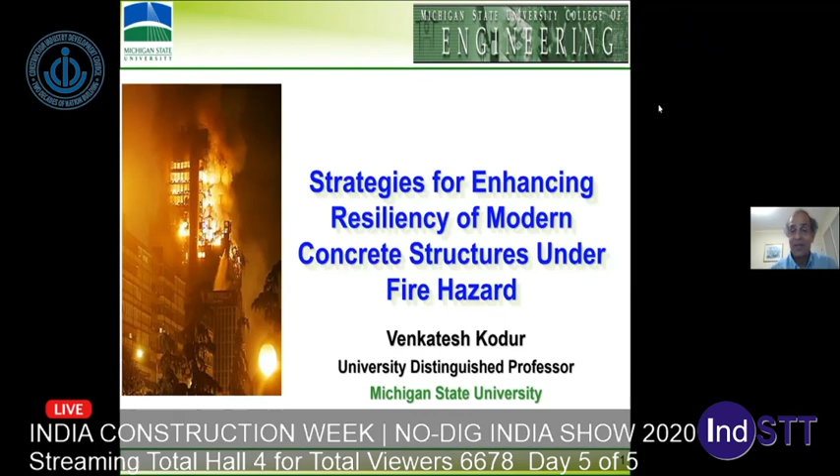The title of my talk is on strategies for enhancing resiliency of modern concrete structures under fire hazard. The buzzwords here are resiliency, modern concrete structures, and fire hazard. So those three are the buzzwords here.

What I'm going to do today is give you some background on the overall importance of fire safety, specifically in buildings but also in critical infrastructure. Then I'll look at why resiliency is much more important in current or modern concrete structures as opposed to structures from 30 years ago. I will illustrate some fire statistics to show the magnitude of the fire problem around the world.

After that, I will briefly mention various experimental and numerical studies we have carried out to develop techniques and technologies to overcome fire problems, especially with new concretes. I'll discuss some critical parameters, and finally, at the end, I'll point out some innovative strategies that can be implemented in new concretes and new structures to overcome not only the fire problem, but also enhance resiliency.

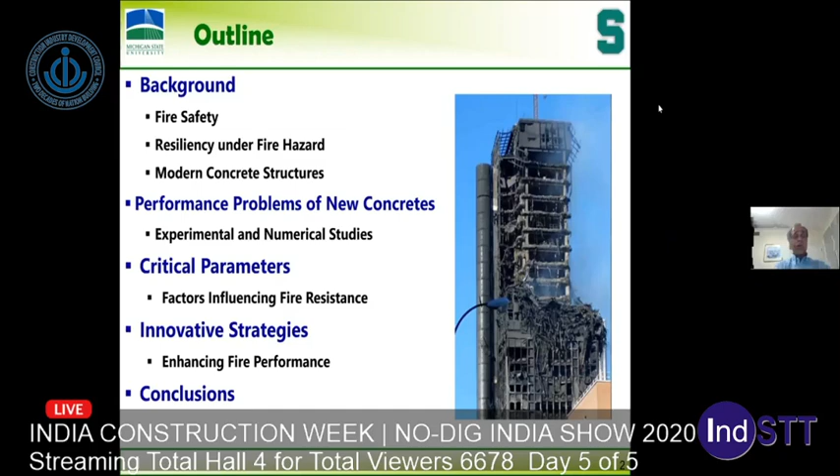As we all know, concrete is the most widely used construction material in most, if not all, countries around the world. There are a number of advantages, and a lot of times these advantages are taught very well, even in early concrete courses. But one of them, which is conveniently forgotten, is...

It started because timber or steel has significant problems with fire resistance. I will define what fire resistance is. One of the best materials from a fire safety point of view is concrete for structural members. That's why it's widely used as well.

There has been significant research and development with respect to concrete, especially from a materials point of view. This has led to new concretes, such as high performance concretes, high strength concretes, ultra high performance concrete, and fiber reinforced concrete. Much of these concretes provide very good strength, stiffness, durability, sustainability, you name it, much of the needed properties. However, with the recent concretes, one of the problems is fire, which we will come to in a second.

Fire is a major hazard in built infrastructure, especially in buildings, because of life safety requirements — fire poses a significant hazard and threat to the built environment. Conventional concretes usually have much higher mass and much higher fire resistance, but the same is not true with the new types of concrete, which I will show you quickly.

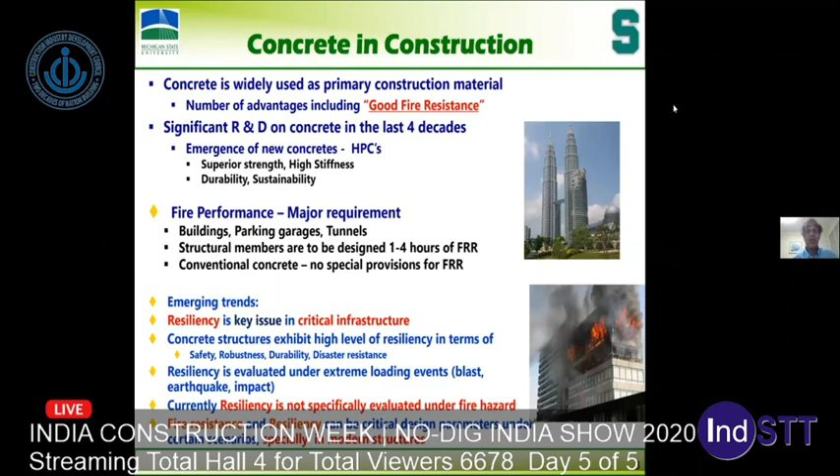The emerging trend over the last 30 to 40 years, in most parts of the world, is that resiliency is the key buzzword for critical infrastructure. This includes buildings, bridges, tunnels, whichever we classify as critical especially. Concrete structures exhibit very high levels of resiliency in terms of safety, robustness, and disaster resiliency compared to different materials.

However, today, in the current way of doing things, we evaluate this resiliency in critical infrastructure under blast, earthquake, and impact, but we don't do even the basic things for fire hazard. It's all based on prescriptive approaches developed 40 to 50 years ago, present in the codes and standards — not in any country, even in the US. These are all based on single tests done on columns at Underwriters Laboratories or NRC Canada. Still, we continue to use those provisions, which are not really applicable for modern construction.

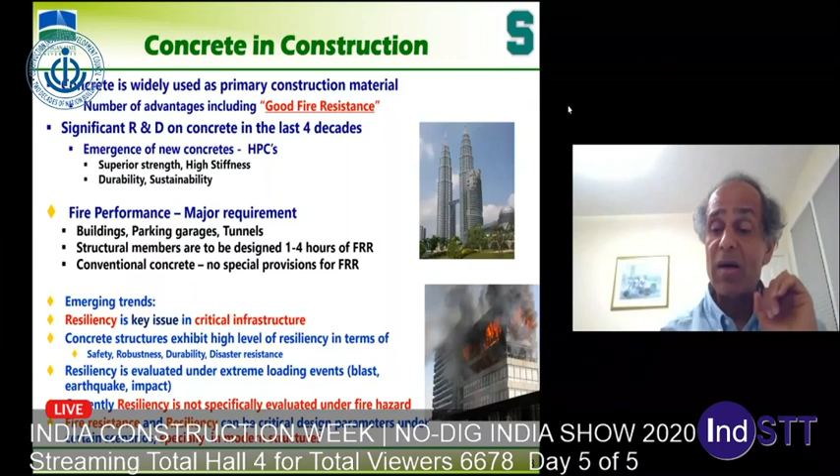So, fire resistance and resiliency specifically under fire hazard are not evaluated, and modern concrete structures are susceptible to problems, especially under fire.

Now, I don't want to spend too much time. Fire, as you all know, is a significant hazard in terms of statistics, not only for people but also for infrastructure or structures. Here are some statistics: in the US, there were more than 1.3 million fires leading to more than $50 billion of damage in 2017, almost about 2% of our GDP.

Now, when fire happens, remember it can start if something goes out of control.

Either lightning can start a fire on a bridge, for example, or something going out of control in the kitchen can start an accidental fire, like an electric short circuit. That's a primary event. Also, fire can start following a blast happening somewhere, or an impact.

A truck hits a bridge - that impact doesn't do much damage. The bridge is designed for that, but it's not designed for the fire which follows. In 9/11, the buildings were designed to account for the impact loading of a smaller aircraft, not that aircraft. I was part of that investigation, but when we looked at it, it was never designed to account for the fires that ensued the impact loading.

Similarly, even floods can lead to fires, as it happened in New Jersey in 2012 with Hurricane Sandy. So as a secondary event, fire can do much more damage than the primary event itself.

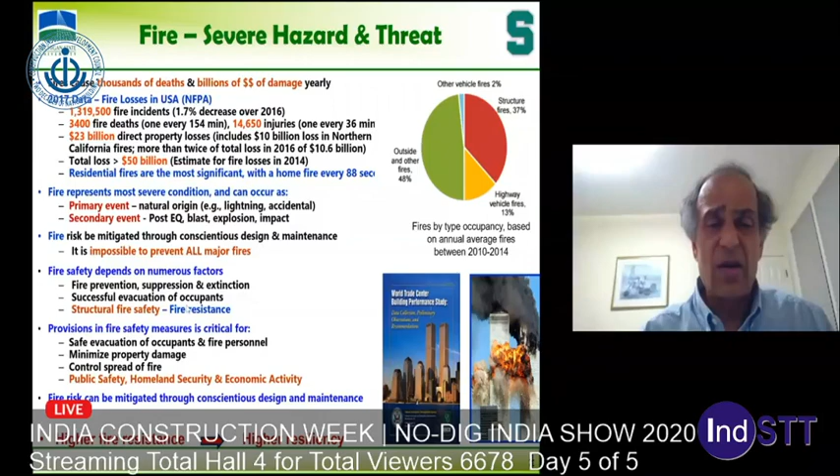Now there are a number of fires around the world. These are some of the recent fires in the United States. For example, the damages from the November 2018 California wildfires were more than $3 billion for structures, and more than $26 billion of insurance was paid out because of that.

This was not major structures because it was outside the towns, but there was some kind of damage to some structures as well.

Now, in addition to 9/11, obviously you all know much more about this, there were bridge fires in the United States, tunnel fires, and warehouse fires. Fires do happen - the Oakland warehouse fire, where 36 people died, again in Oakland, California. And in this case also, there was significant structural damage.

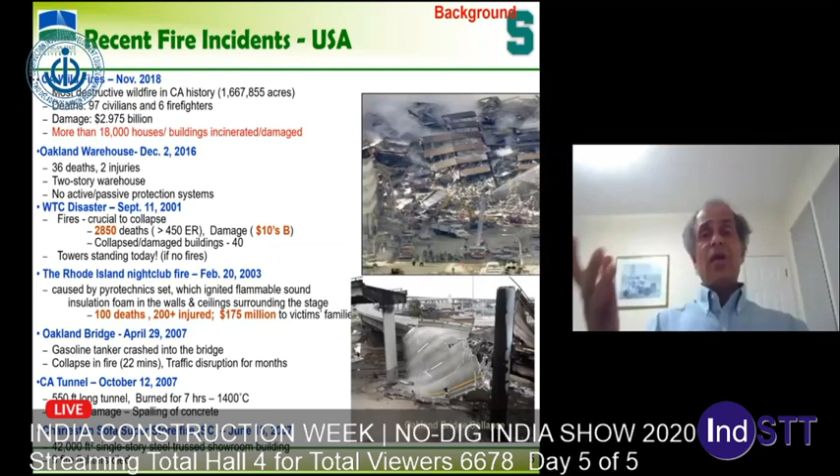Now, I'll just illustrate, there is not much time in today's presentation, but quickly I'll show you how things can go wrong. This is the I-85 bridge outside of Atlanta, Georgia, near Atlanta airport. On a fine evening, 30th of March 2017, spring had just started, what happened was they put underneath the bridge, for drainage repair, a lot of pipes - polyvinyl chloride, PVC pipes.

And then they left it and went, because they wanted to start the work late April or May. All these pipes were there. A homeless person - it was a cold evening - came in and set fire to all the rubble or paper which was around it. And then that went out of control and spread into the pipes, and a huge fire started.

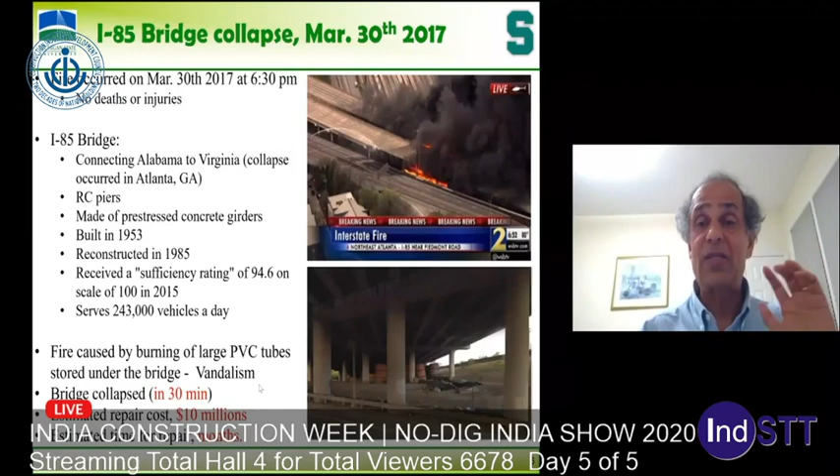And look at this fire - the fire department, because it was closer to the city, Atlanta, a lot of fire engines or firefighting trucks came, but it couldn't be fought. They had to withdraw because of significant spalling. You can see this here - rebars completely exposed, spans of the bridge collapsed. You won't believe how much damage.

Delta had to cancel about 1,000 flights over the next 3 days or more because nobody could get to work. That's the hub of Delta, world's largest airport basically. So I think that's the kind of damage that can happen, and it took weeks for the bridge to be rebuilt.

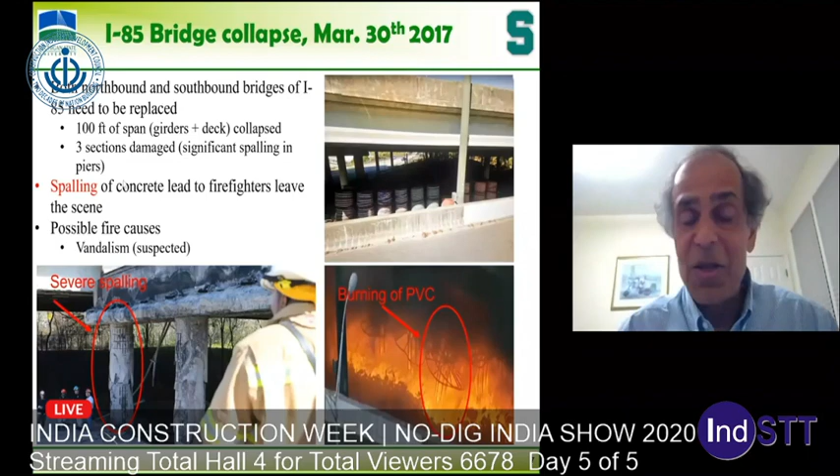There are a number of buildings - I can name hundreds of buildings which were on fire in the last 5 years. An important one is in Tehran, the Plasco building, a 17-story building that collapsed. A number of firefighters died, as well as people. Grenfell Tower, you know what happened there - concrete building. The first one, Plasco, was a steel building.

I was part of the investigation at Delft University of Architecture, a 13-story university building which collapsed because a fire started due to an electric short circuit in a coffee kettle, which was not turned off. So there are a number of fires in buildings - it's a real hazard which we are looking at.

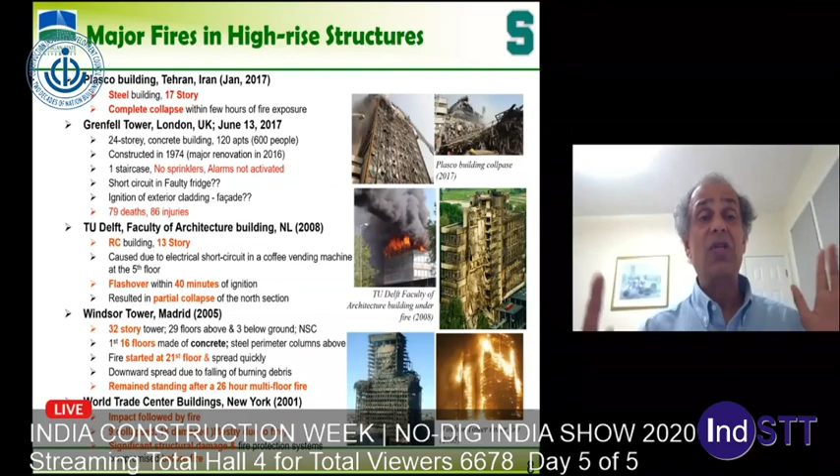If you look at world statistics, as you can see here, India especially has the worst fire record - nearly 24,000 people die every year because of fire incidents. It may not be due to structural damage, but fire as a whole has to be considered a hazard. A lot of times smoke is what kills more people than anything to do with the structure itself.

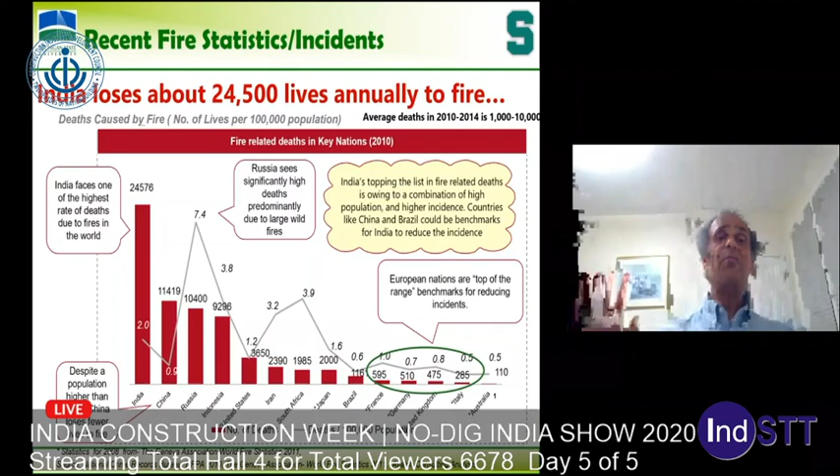Now, how does the current codes address this?

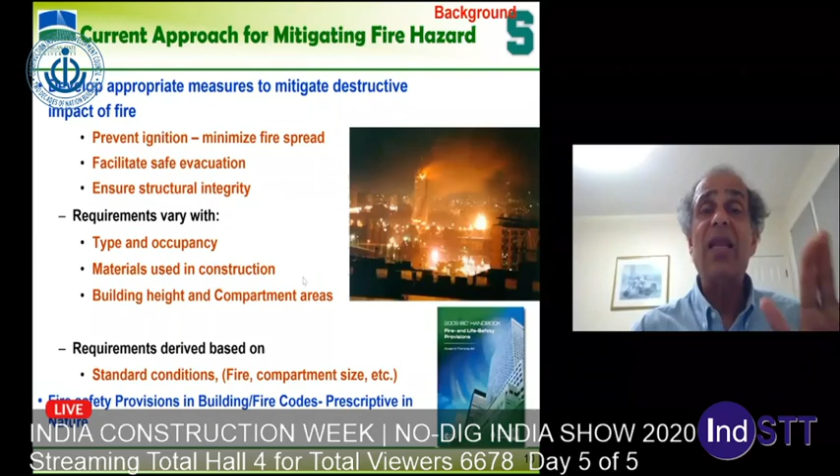Current codes address this by putting in a lot of fire protection measures, and this depends on the height of the building and the type of occupancy. For example, if you have buildings with old age people or hospitals, you need to provide higher fire resistance, so it should stay longer than an office building. These are put in place in building codes, including in India, and every other country has this. Without that, you cannot get a permit to have the building.

What are the fire safety strategies? We put in a lot of measures, as I said, sprinklers. Fire comes out, it should be put out by sprinklers automatically. Most new buildings in the United States are sprinklered, but often sprinklers are not effective, so then people have to be sent out. Then you have fire to be contained to the source of origin in one compartment or one room or two rooms. That's done through barriers, or your structure has to stand up till the fire is fought.

This is what is called fire resistance. Depending on the height and the occupancy type, you need 1 hour, 2 hours, 3 hours, or 4 hours. Under so-called standard fire, the building has to stand up. Okay, so I will skip this slide.

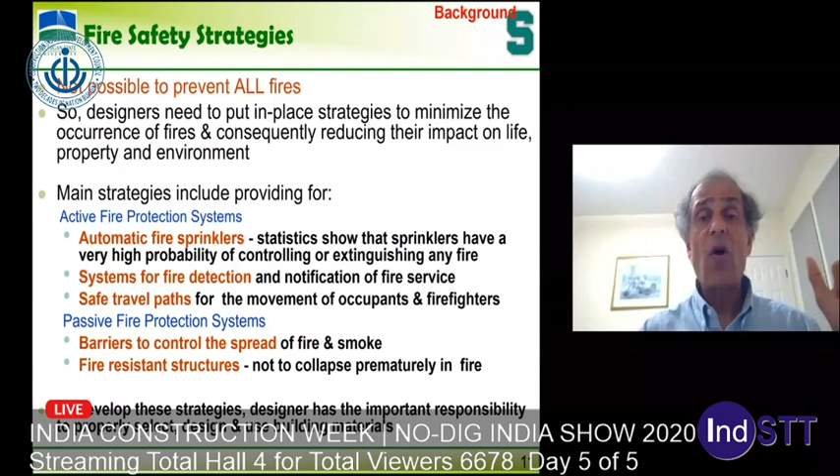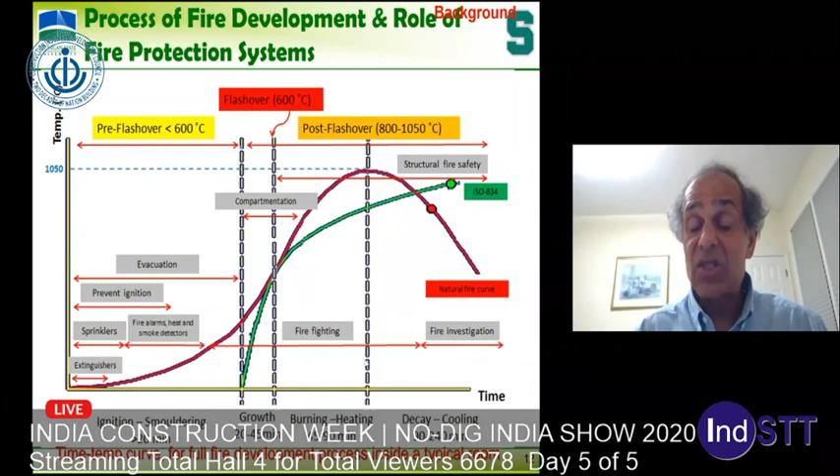So fire grows something like this. Just remember this, nothing happens to the structure here. I'm talking more about structure. People should get out at this time, but for structure, this is the part where structural fire resistance comes into play. So typically you need 2 to 3 hours of resistance in structure so it does not collapse under fire.

This fire resistance depends on a number of factors, including what kind of fire you have, and the type of materials, whether it's concrete or steel. You can see this is loss of strength with temperature. Different materials lose strength at different temperatures. So all this has to be accounted for.

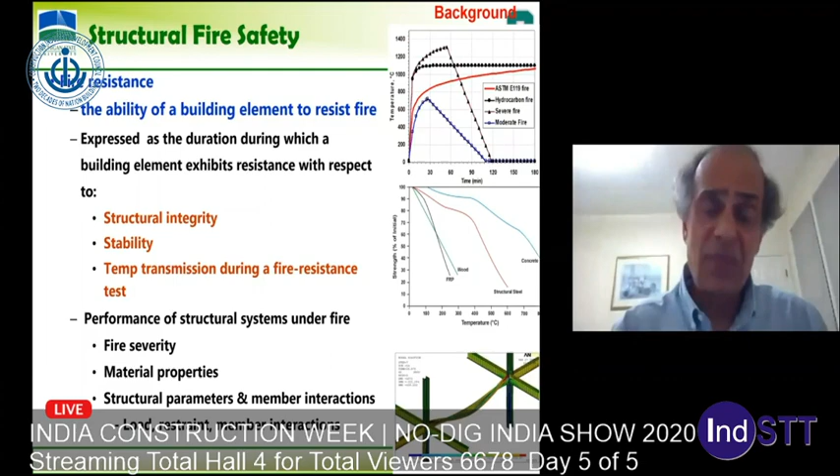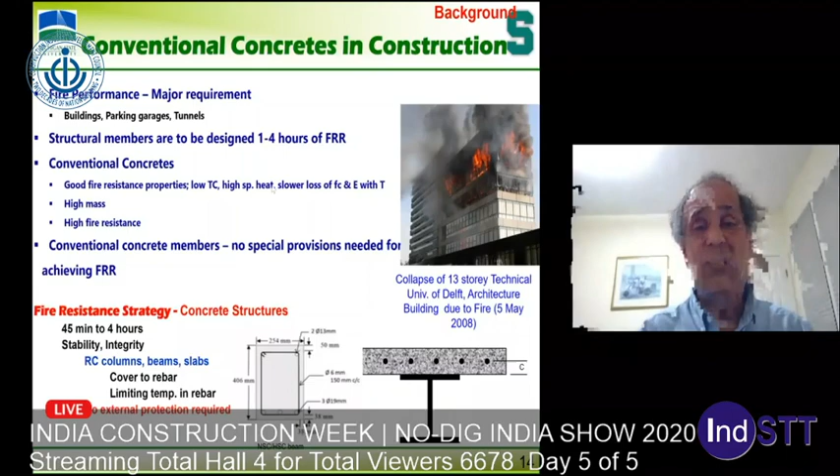Now, American codes are so prescriptive, there's no other way of engineering the system right now. For 1 hour, as long as your dimension is 8 inches minimum, that's 200 millimeters, you get 1 hour in a column cross section, and you need to provide 1 inch concrete cover for getting a 1 hour rating. For 1.5 inch concrete cover, as long as your minimum dimension is 9 inches, you get 1.5 hours rating, and so on. As simple as that, which is not realistic.

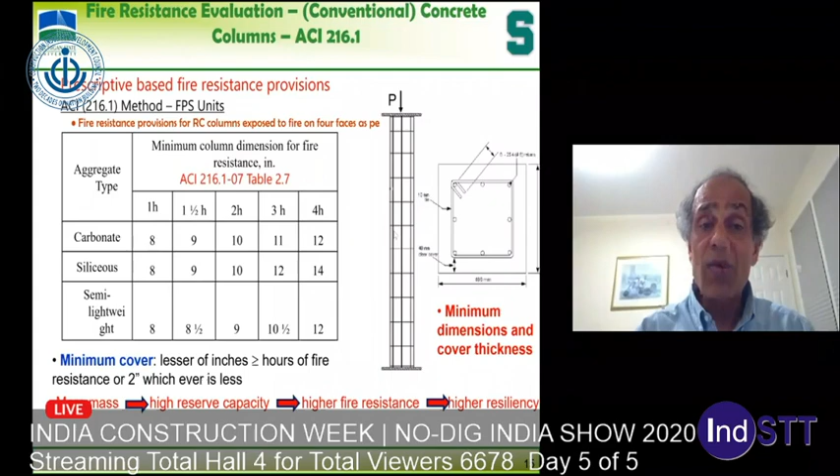Now, what about Euro codes? Very much similar, look at this. In one table, they cover beams, columns, slabs, and walls, with the same approach, very prescriptive. Now I have to move on quickly because of the time.

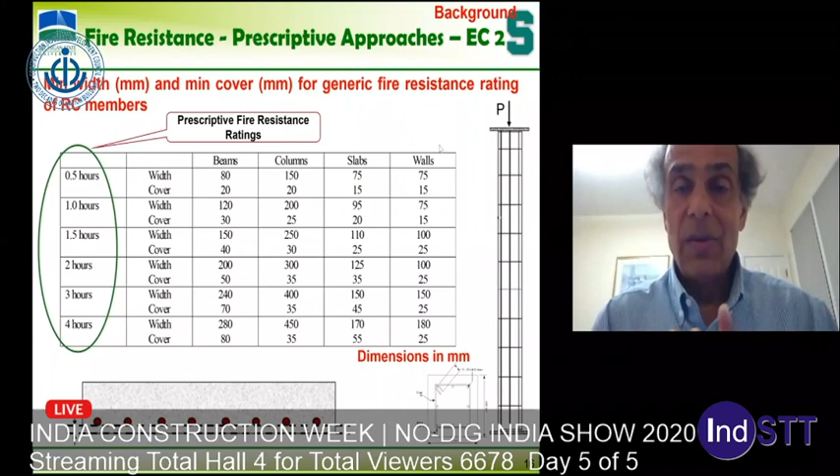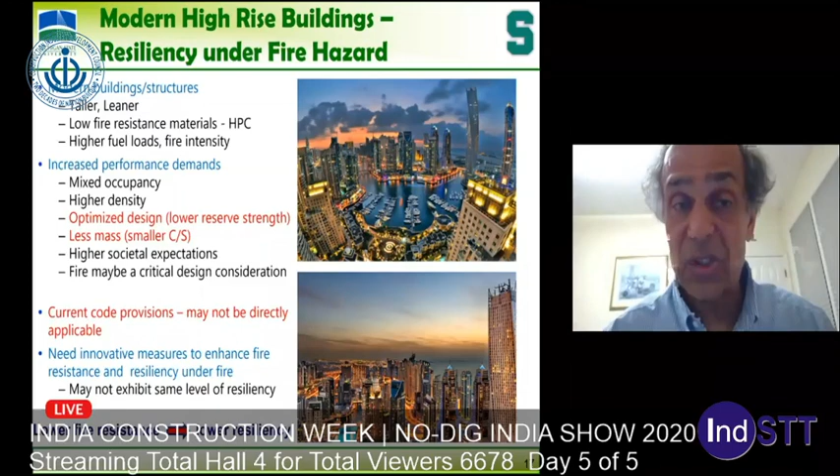Modern structures have significant problems because they are typically taller compared to 70s, 40s, 50s structures, and they are leaner, I will show you that, and they are made of new types of materials. Newer materials have lower fire performance, and we have increased demand on modern structures because we use all this nonlinear analysis and make the structure very slim. So the current codes, if you take the modern structure, have lower fire resistance compared to the equivalent structure of yesteryears.

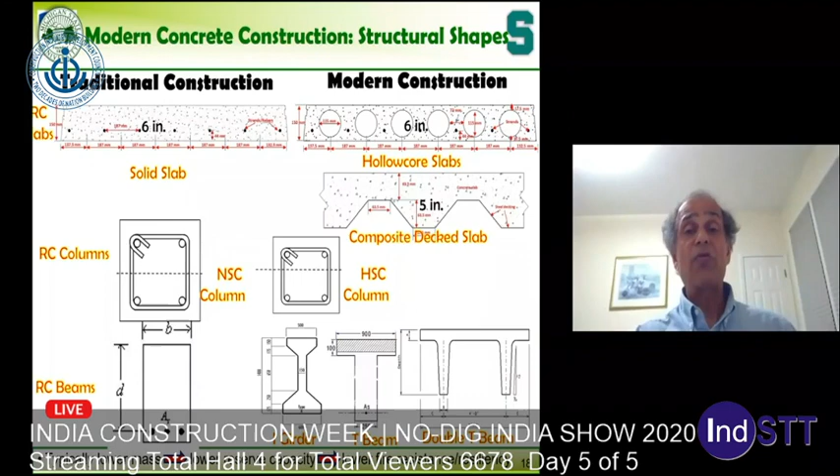Now look at this, how different modern slabs are, if you take a solid slab versus a hollow core slab. If you take a column, look at this, how small we are building with higher strength concrete. Same thing, we are using this type of shapes. Similarly, our concretes have much more problems because we increase the concrete strengths, and it comes with lower permeability, making it susceptible to two things.

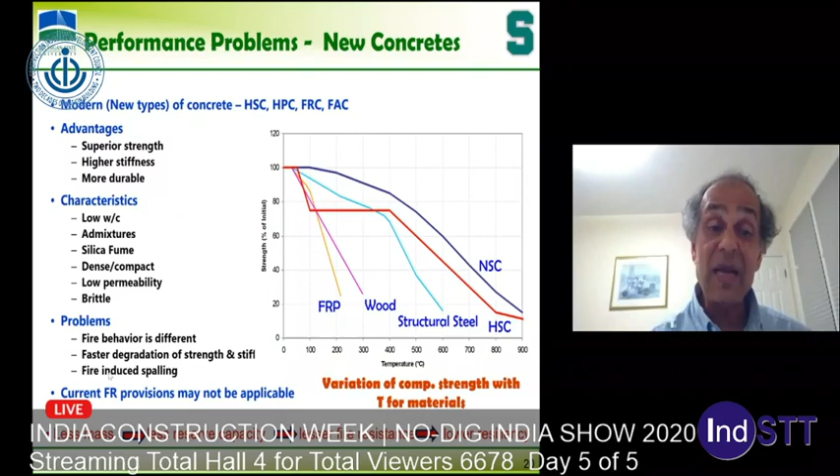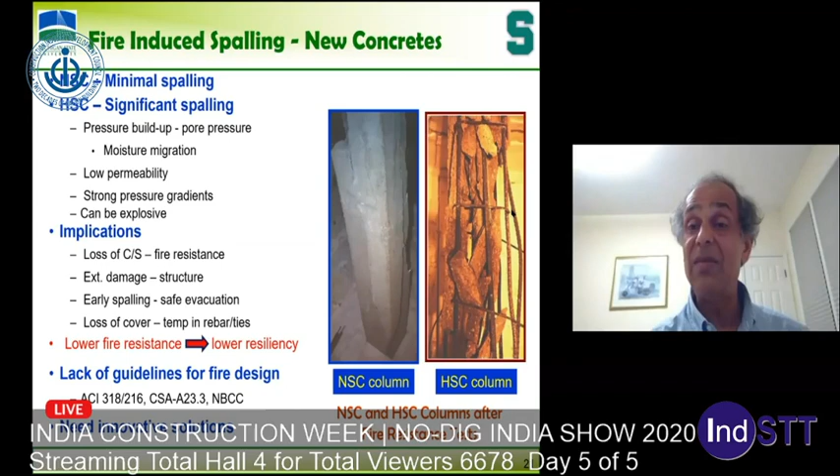The second bigger problem is the occurrence of so-called fire-induced spalling. Look at a concrete column, 6 hours in fire, which I tested, nothing happens, a 16-inch column. This is a typical column used in Chicago. And look at this high strength concrete column, it spalls in 19 minutes. This was done for the Portland Cement Association and Construction Technology Laboratories. I did these tests at NRC, about 15 columns were tested for them, in addition to a number of other things, so we developed a lot of guidelines.

So this spalling, basically why it happens, is a buildup—when exposed to fire, this has lower permeability, moisture becomes vapor, and it cannot easily get out here.

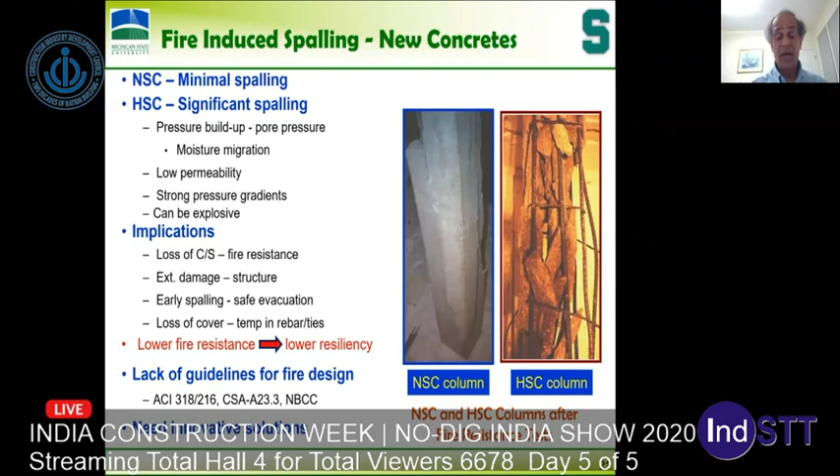10 to the power of minus 16 is the permeability. When you reduce it by 100 to 1000 times to 10 to the power of minus 18, that pore pressure converts into the tensile strength and pushes this out. So boom, boom, boom, throughout this fire scenario, you will have spalling, and this spalling can reduce fire resistance significantly.

We did a number of tests, and we did the material property test. Over 30 years of my research has been focused on this, first at NRC Canada and then at Michigan State University now. We've developed about 15 PhDs so far who have graduated on related topics. We have developed advanced analysis models, and recent work has been to develop much more guidelines.

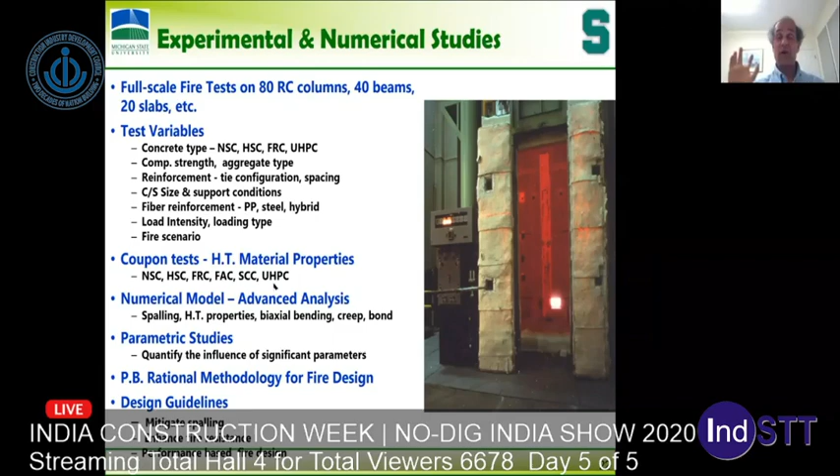As well as with ultra-high performance concrete. The concrete, as I said before, current codes say only cover thickness is the issue, the size of the member, but it is affected by so many factors: strength of concrete, reinforcement layout, density of concrete, type of aggregate, whether you're using limestone or quartz. So there's a number of things.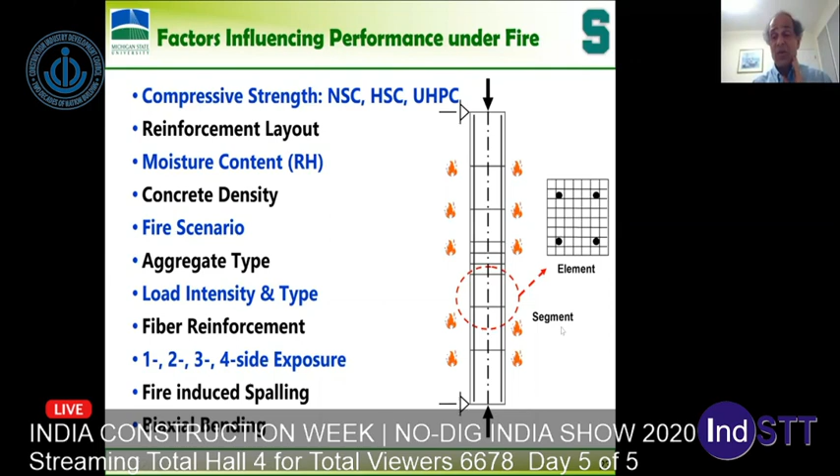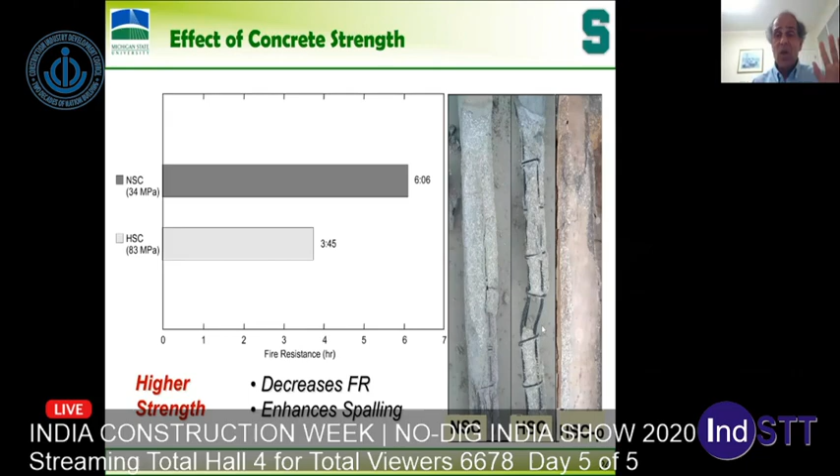As you can see, higher strength concretes, conventional concretes, but if you add fibers, you can significantly minimize this spalling which is happening. Okay? So another thing is, if you bend the ties, it enhances fire resistance significantly. Bending the ties at 135 degrees - this we did for PCA, and this is in American codes right now. You can reduce spalling significantly even with higher strength concretes.

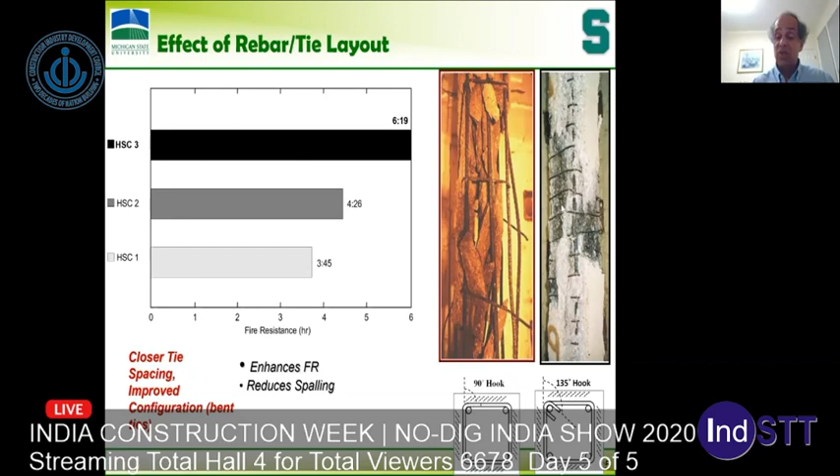Then concrete, when it is subjected to a column, for example, when it is subjected to concentric loading under fire, you have explosive spalling happening on different sides. That means your concentrically loaded column becomes eccentrically loaded, either due to development of thermal gradients when only one side, two sides, or three sides are exposed to fire.

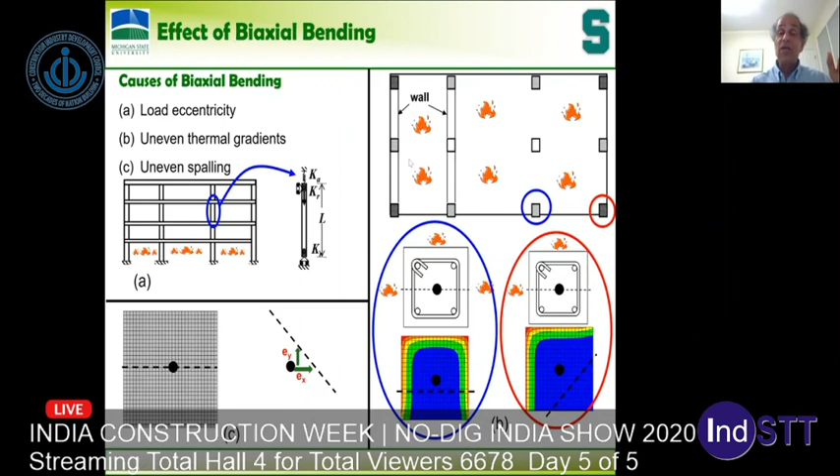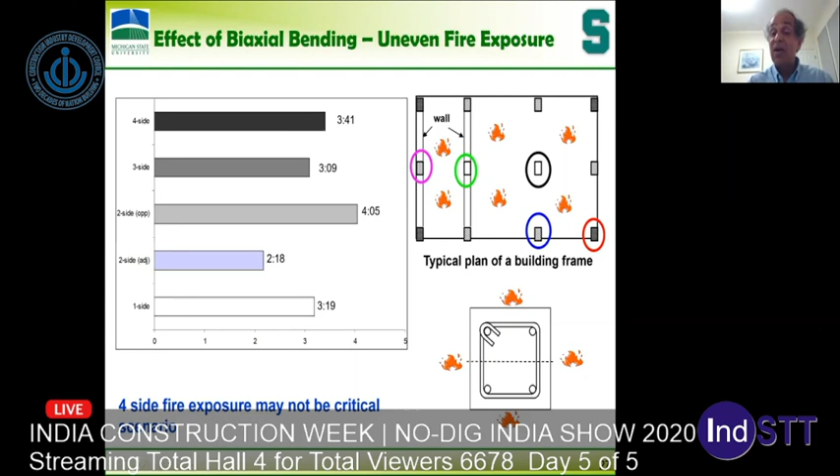So a three-side exposure to fire, or two adjacent sides exposed to fire, can result in much lower fire resistance than a four-side exposure to fire. This can cause significant problems in real life. Okay, so let me skip this.

How can you overcome this? If you can add polypropylene fibers, these fibers are 0.1 to 0.2% by mass, by volume. They melt at early temperatures of 160 degrees and increase the permeability, or create pores where the pore pressure can easily be dissipated. If you add steel fibers, it increases the tensile strength and significantly overcomes the pore pressure - it withstands the pore pressure so that there is very little spalling.

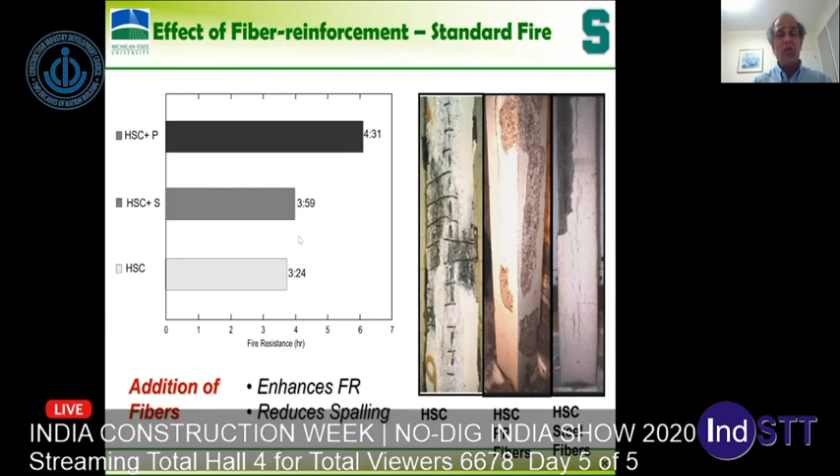You can do a few other things. So look at the columns we tested - these are all tested in the lab. Plain concrete, polypropylene fibers - no spalling, steel fibers - very little spalling, as well as hybrid fibers. You can change the configuration.

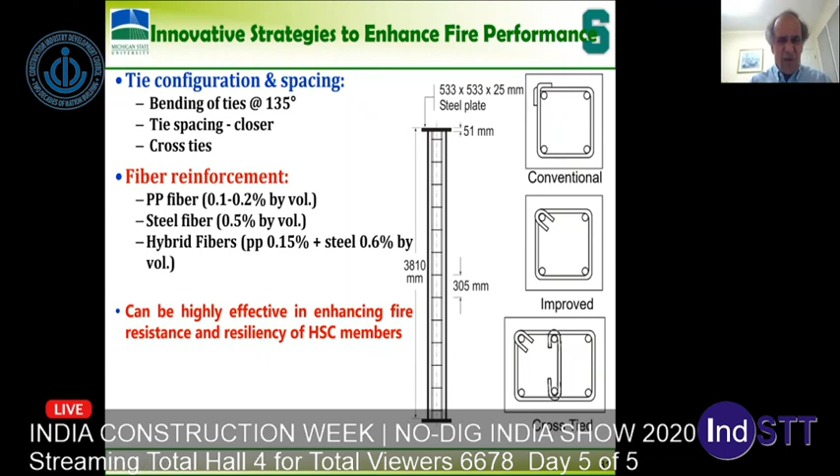If you provide the ties like this, it does wonders. It increases the fire resistance. Instead of failing this column in fire at 1.5 hours, it can go up to 4 hours just by bending these ties or by providing cross ties. And there are very minor other things like changing the aggregate and stuff.

I'm not going to get into this. The last point I want to make is you have to engineer it, and you have to use advanced analysis approaches wherein at a system level, you need to account for the realistic fire which can happen in a structure, realistic material properties - if it is high strength concrete, high performance concrete, ultra high performance concrete, whatever it is. Then you have to account for this spalling and other things which are very complicated.

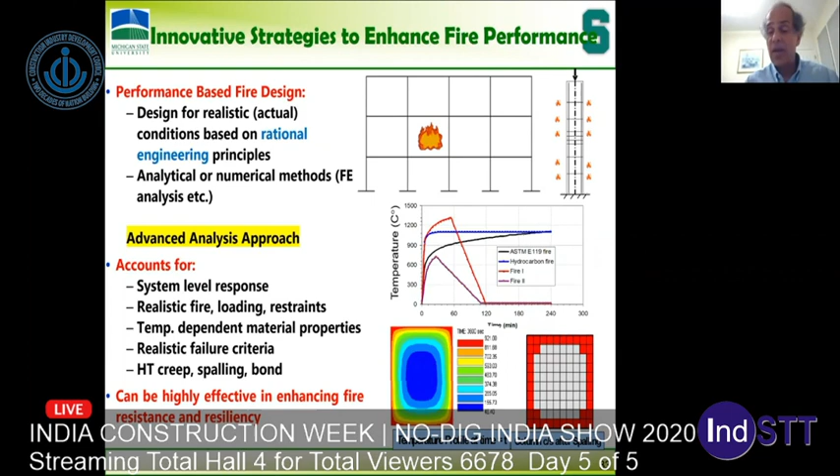Even at this stage, these are all PhD topics, for example. There is very little data. And then you can carry out the analysis, first finding out the fire scenario, then you find out the temperatures, and then you calculate the structural response. And then include all your spalling, creep, bond degradation. Everything changes with temperature - that's where the complexity gets in.

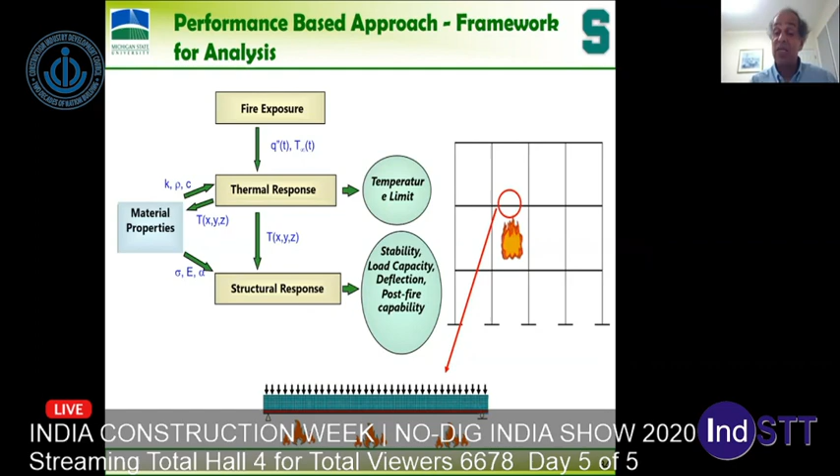Okay, so we have done a lot of this. It's published in a number of journal papers. But let me conclude here.

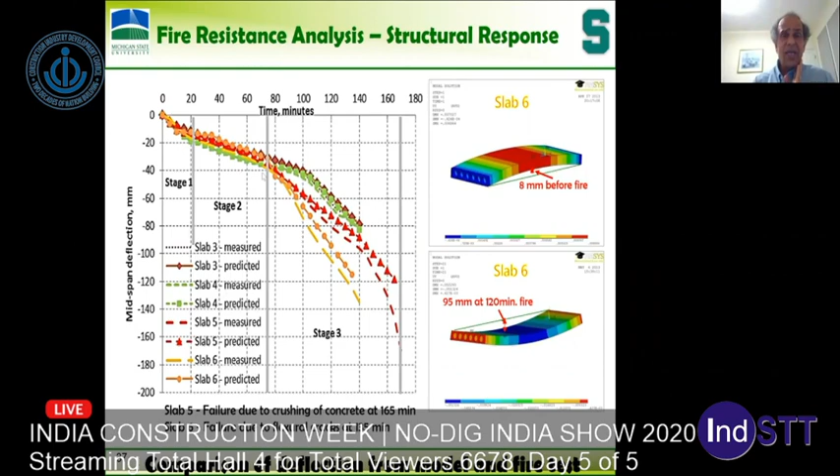So resiliency of structures should be one of the critical considerations under fire hazard, especially with modern concrete construction. There are very few problems with respect to conventional concretes, but the same cannot be said about modern concretes. High-strength concrete structural members, ultra-high performance concretes, exhibit lower performance as compared to conventional concretes, as well as significant spalling problems.

So you have to engineer the system through advanced analysis. We call it performance-based design, but you have to use advanced calculation models so that you can develop unique strategies for overcoming this. As I showed you, simple modifications such as tie configuration and addition of fibers can help in overcoming this problem. This is one of the recent articles in ACI, a very general article in Concrete International.

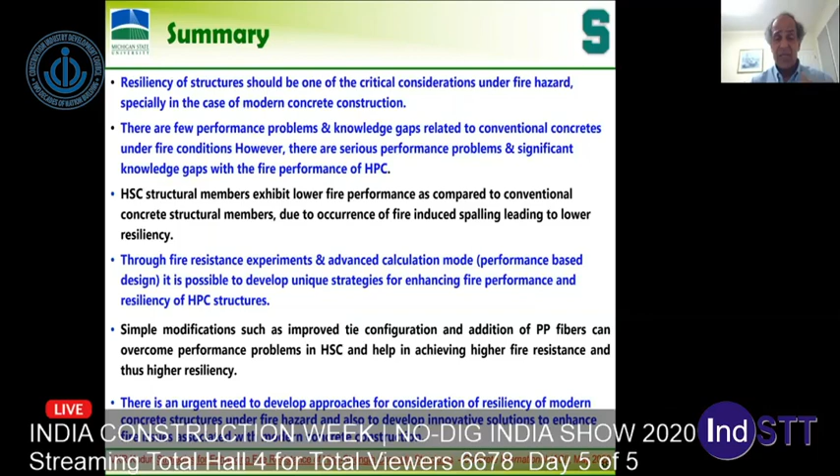There are a number of journal papers associated with this. And finally, I want to say this - there are very limited books in the fire engineering area. This is one of our recent books. It addresses not only concrete structures, but steel, wood, timber, masonry, FRP - all structures, how to design for fire. This is a new textbook which just came out from McGraw-Hill last month.